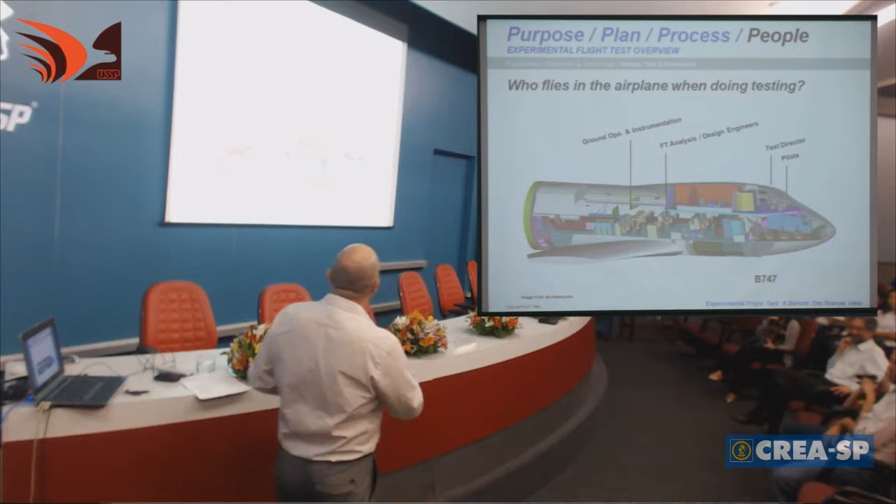Because who knows the airplane? The person who did the design. But also you need a second set of eyes, another person that is seeing the same data and is giving another opinion.

And then on the back of the airplane, we have what we know as ground operations, because basically you need to fly everywhere. So you need ground operations, I think it's operaciones en tierra. So let's say that we're going to go to Iceland because we need to do some crosswind testing. Who's going to be talking with the people on the ground in that new airport? They are going to be coordinating that.

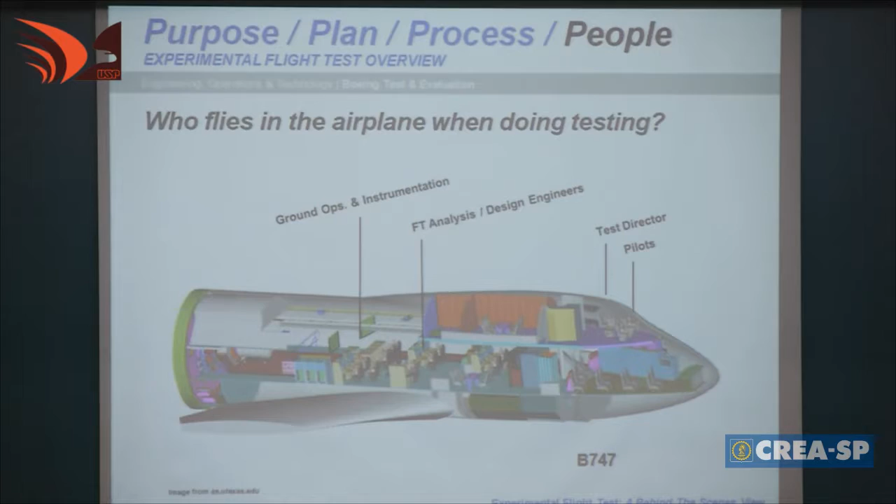Or maybe we're staying at Boeing Field, which is, let's say, our airport. It is not an airport, but let's say that it's our base. And they are going to be doing all of the configuration changes of the airplane and are going to provide the airplane with whatever is needed for that specific test. So let's say that you have a test in which they need to load pallets with some weight.

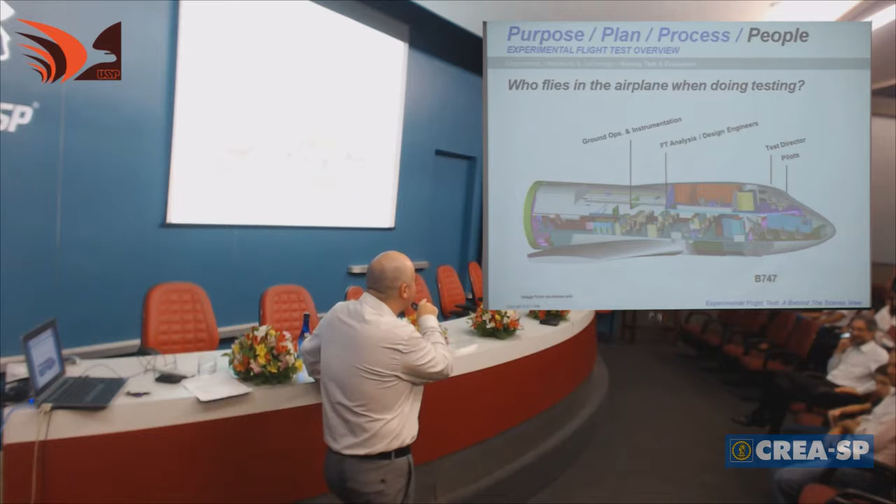Maybe you guys have taken an electronics class, and I think you should, or a class in signal analysis, and you'll see, sometimes you expect to see this line, and then you see this line that is like, hold on, what is happening? Then you have to go and track that signal and see, did I do my ground correctly? Because many of the problems are ground related: you didn't ground it, or maybe you got a ground loop, or maybe simply some connector got mispinned. It's the easiest solution, but identifying that that's the problem takes you forever.

So this is basically who flies on a plane. So let me go to the next one. Maybe you'll be thinking how a flight test airplane looks inside. Everyone is like, oh, Diego, do you guys have all of these nice seats and everything finished? And I'm like, no, actually, I wish I had a nice chair to sit down.

So you guys see here racks, armarios, that are full of instrumentation and pieces of equipment for data acquisition or multiplexing, or some devices that you need to do some specific type of analysis. So let me go here. This one, you can see, hold on.

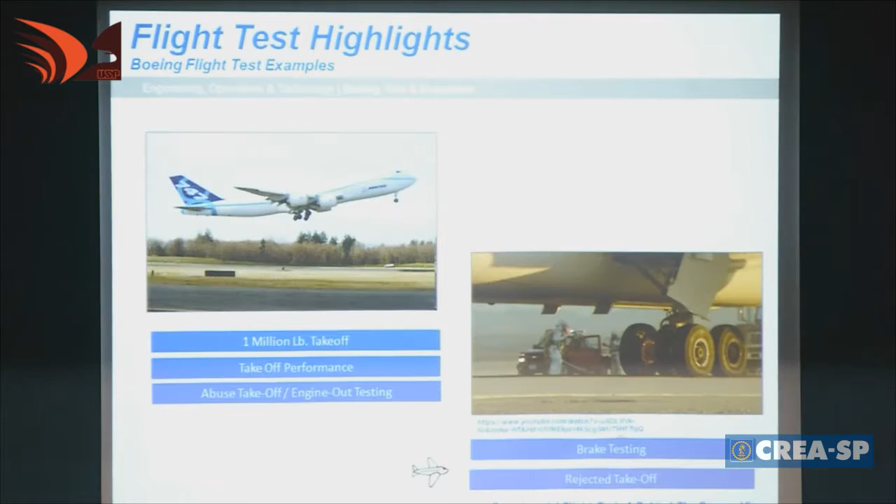As rewarding as those in Boeing test and evaluation. And getting a chance to test a brand new airplane just might be the pinnacle. Such is the case with the new Boeing 787-9 Dreamliner. And with any new airplane, Boeing must demonstrate that even when fully loaded, the airplane can safely stop the takeoff on short notice. To certify the airplane, we make sure that the airplane can stop on the runway at its highest takeoff weight and its maximum speed.

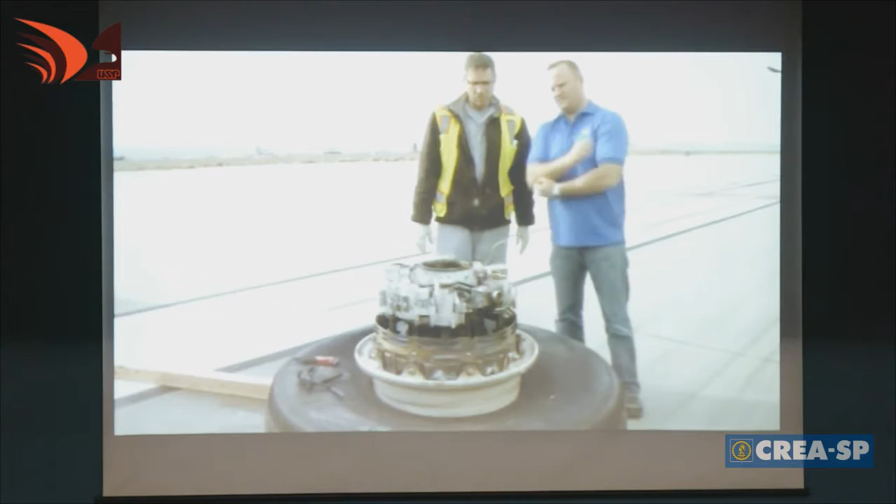It seems very unlikely this would ever happen. However, it is a requirement that we test this, and that's what we do. We test very extreme situations that we really expect to never encounter. Those extremes include not only loading the plane to its maximum weight and accelerating to maximum speed, but installing brakes that are 99% worn. We grind the brakes down to the thinnest that they can ever be. We deactivate one of the brakes to simulate that there's a failure.

So, I mean, we go to extreme lengths to make sure that the test is the absolute worst case scenario. It's a scenario that takes some intense planning. 90% preparation and 10% execution. A very coordinated effort with test engineers, pilots, emergency crews, and airport personnel, to name just a few. We've been doing landing performance and high-speed rejected takeoff performance for probably a month prior to actually conducting this test point, which is that maximum energy condition.

Then, the moment of truth. Bring the engines up. You notice that the airplane accelerates very slowly because it's very, very heavy. Accelerate the airplane again to about 188 knots of ground speed. And then once you get to the takeoff speed, you slam on the brakes. The 787-9 makes a complete and safe stop.

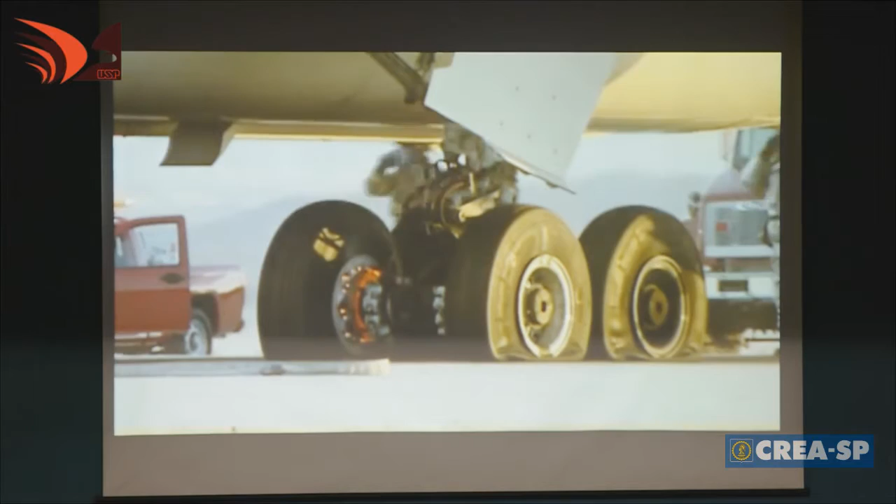Now, it's crucial to monitor the energy created from the force placed on the critically worn brakes. To simulate real-time emergency response, fire crews must wait 5 minutes before engaging with the airplane. We are monitoring the wheels, the tires themselves deflate per design. They have devices called fuse plugs within the wheels themselves that melt under high temperature and then in a very controlled fashion release the pressure of the air, of the nitrogen in the tire so they don't blow treads. We want to make sure that that occurs in a very controlled fashion.

From stopping distance to temperature to fail-safes, Boeing test and evaluation makes sure everything goes safely, exactly according to plan. From a performance perspective, it was right on. It's disturbingly unexciting. And brings the 787-9 one step closer to the flying public.

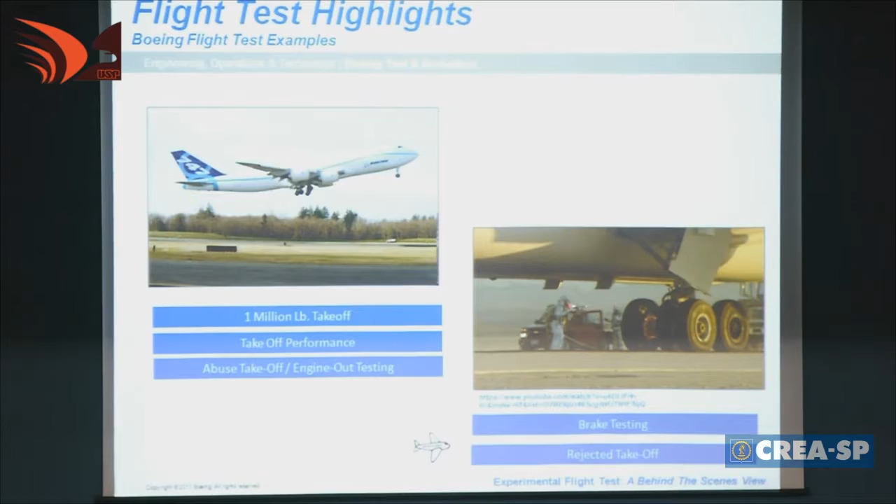Okay, so I have another test that is called the wake vortex test. So anyone have heard about this test before? So let's say, okay. How many of you, no one does kayaking, so I cannot go to that example. But if you're in a big boat, and you're in a small boat on the back, usually you see this big boat having this wave on the water, and as a small boat, you're like, yeah, same thing happens on the air, kind of, in a similar way.

So you have this big airplane. You can be in another airplane just right behind it, because you got the wings and because of aerodynamic characteristics, when the airplane takes off, you're going to generate swirls on the wingtips. And what happened with those swirls?

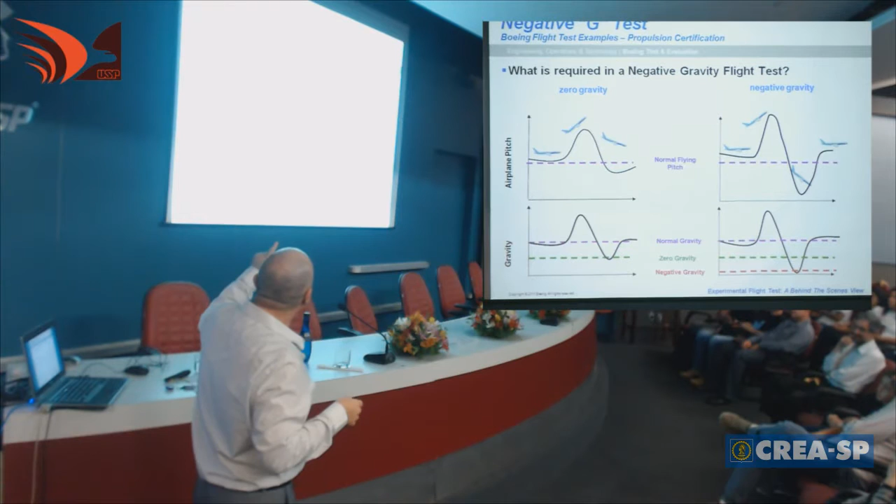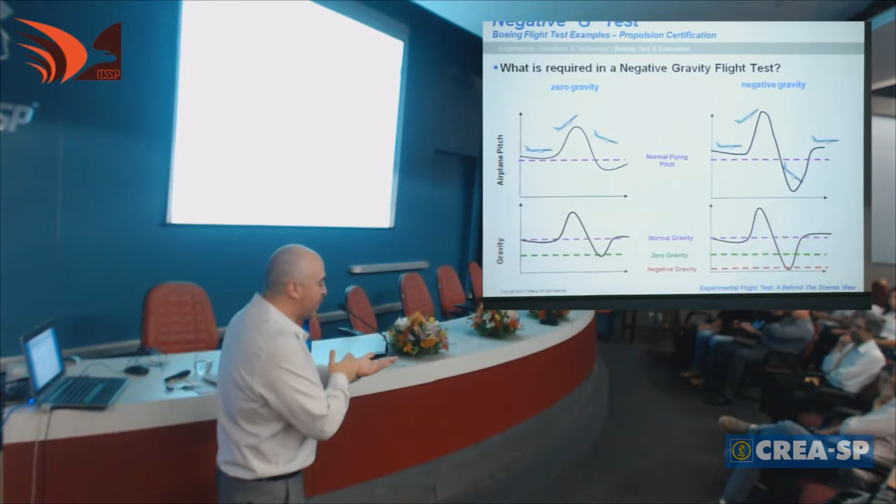So what happens with negative gravity? Usually that doesn't happen. But if you go into an elevator, and the elevator goes too fast, you're like, yeah. It's a state in which you're going to be able to float, basically, because the speed at which you go down is higher than the speed of gravity. And how do we accomplish that? Changing the pitch of the airplane. So you're going to go up, and then you're going to go down. I'll show you the video, it is more interesting. But you're going to experience values of negative Gs. There are some tests that go between 0G and 2Gs, and others in which we see negative Gs.

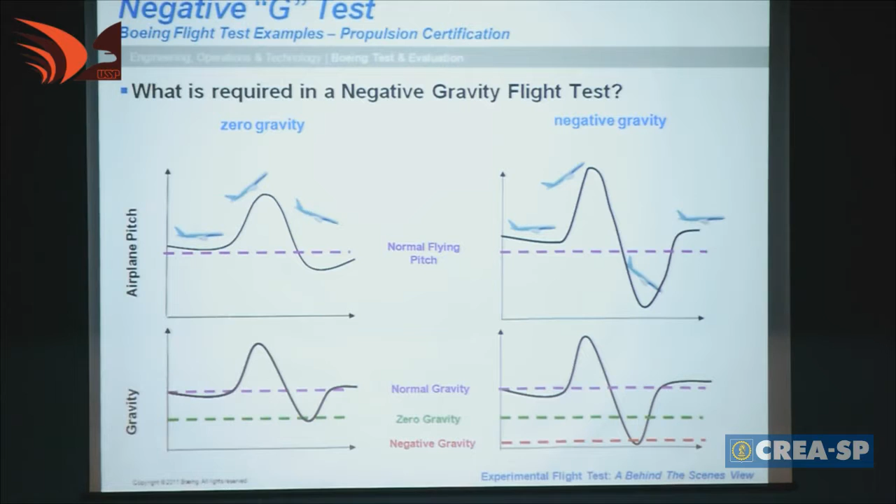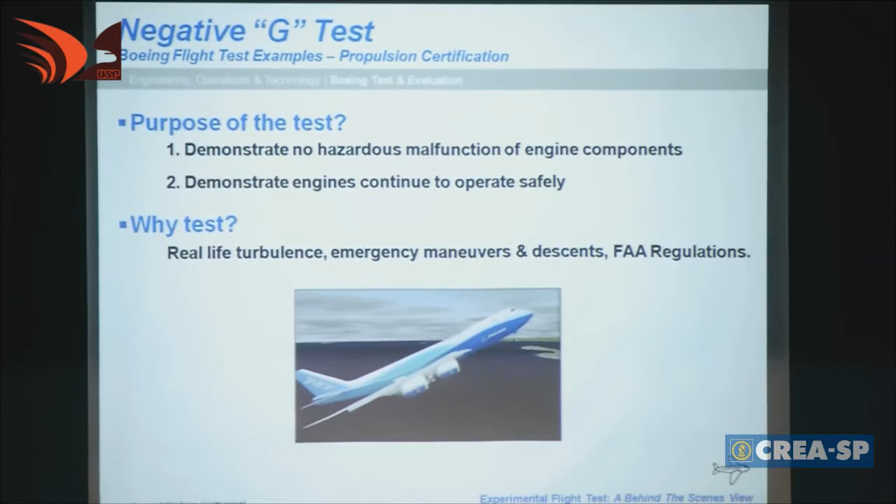Okay, so why do we do this? We need to make sure and prove to the world that if we go into these conditions, the engines are going to be able to withstand them and continue to operate safely. Also, this is part of something called flight load survey, where you go to crazy loading conditions on the airplane to test that the airframe is able to withstand those.

Actually, I was inside this airplane when this happened.

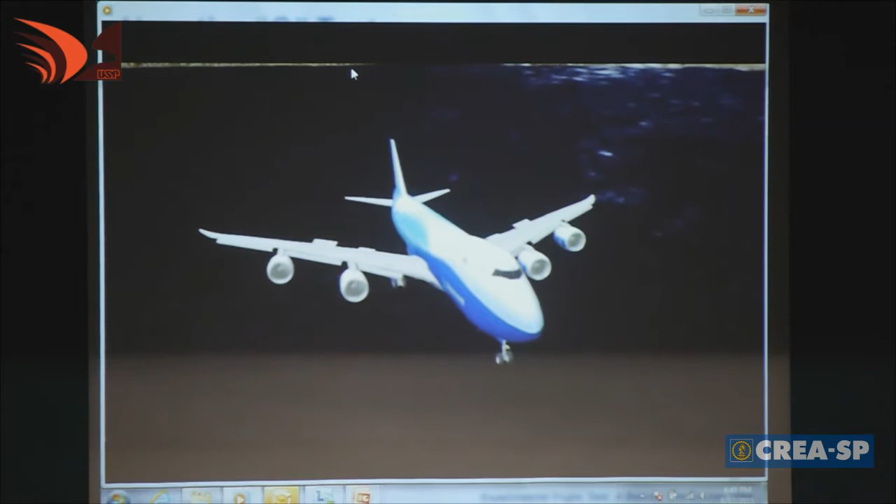Going to 2 times the force of gravity greatly increases the load on the 747-8, which is already flying at its maximum takeoff weight of nearly 1 million pounds. As you start putting stress on the airplane, you'll see the wings will start bending up, and they're under tremendous stress. Really what we're trying to do is take it to the outer corners of the design envelope and demonstrate that the airplane can withstand the flight maneuvers and at the gross weights that we designed it to.

In the cabin, the flight test engineers and structural analysts are trying to stay in their seat while monitoring the airplane's performance. These roller coaster flights can last 4 to 5 hours and are not for the faint of heart. Because they can finish it so quickly, right? You kind of don't have time to, oh yeah, that was great. You got to concentrate what you're doing, right? Get ready for the next one.

A grueling test to make sure the new Boeing 747-8 freighter can handle loads far beyond what it will face once in service. Airplane handled great, easy to fly, well behaved, and just did a great job.

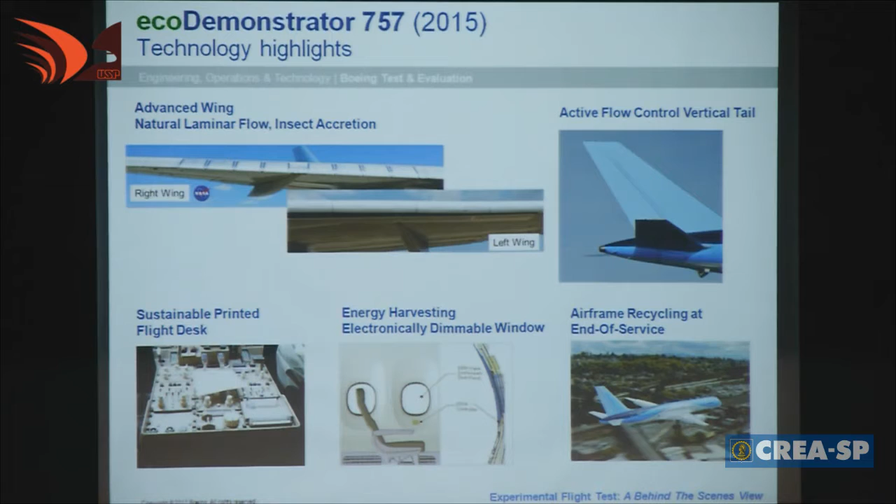Okay, the other one is active flow control. This one is a flight desk that is 3D printed, but what is innovative about it is that we were using recycled composite materials. The middle one on the bottom, the energy harvesting electronically dimmable window, just imagine the concept of having a solar panel, una celda solar, in the window. You're trying to capture energy from the sun, store it, and then use this energy to dim the window. Something the 787 already has is that in the windows we don't have the normal curtain. We push a button and it gets dark. We push another one and it clears up. But in this case, we're trying to prove a concept in which we get the energy from the sun. And the other one is the airframe recycling.

So basically, on the first one, there were different coatings provided by NASA. Have you seen when you're on a long drive and suddenly you see all of those insects on the bumper of your car? Same thing happens with the wing of an airplane. That's why we were going to a place with bugs. Because when you have bugs, the laminar flow is going to change. So we were trying to look for ways to reduce the accretion of bugs, and we were testing some nanotechnologies incorporated in these coatings to reduce that accretion of insects. And also some new design on the leading edge of the airplane.

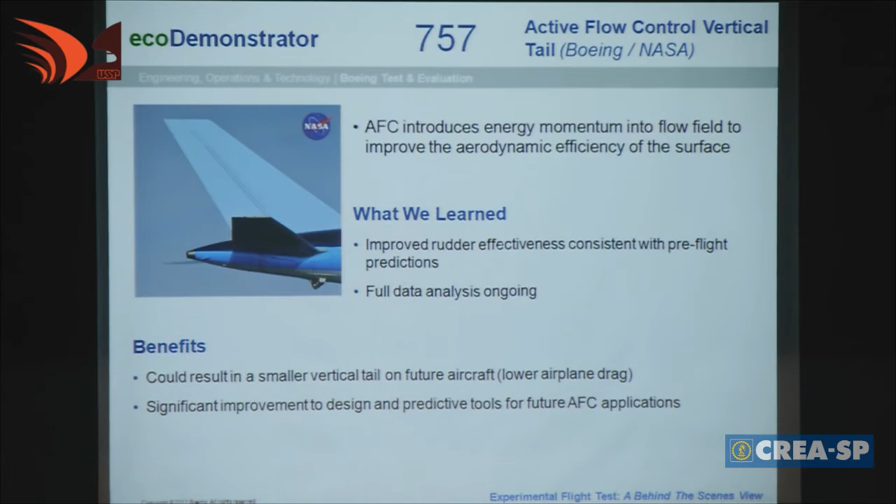So an implication is if we were able to prove that this technology could be incorporated, it's going to reduce the height of the tail, which is heavy, and usually you have space constraints in some hangars. Better crosswind conditions also. Lower area on the tail. And usually the higher stress concentration is going to be on the lower part of the vertical fin.

This one was 3D printed, which we incorporated into the 757, and we were showing that it works, and that we are able to recycle some of the materials.

And let's see. Okay, we have 5 minutes. Do you guys want to see another video? Hopefully it works.

When you're testing an all-new airplane, you go on so many flights, work so many weekends, they start to blend together. But for these Boeing pilots and engineers, this Saturday morning is one to remember. Finish the last test required to certify the 787 Dreamliner. Getting to the point where we've worked so hard for so many years, at the end it's just unbelievable. Just as the fog rolls in, the team sets off from Everett, Washington to complete function and reliability.

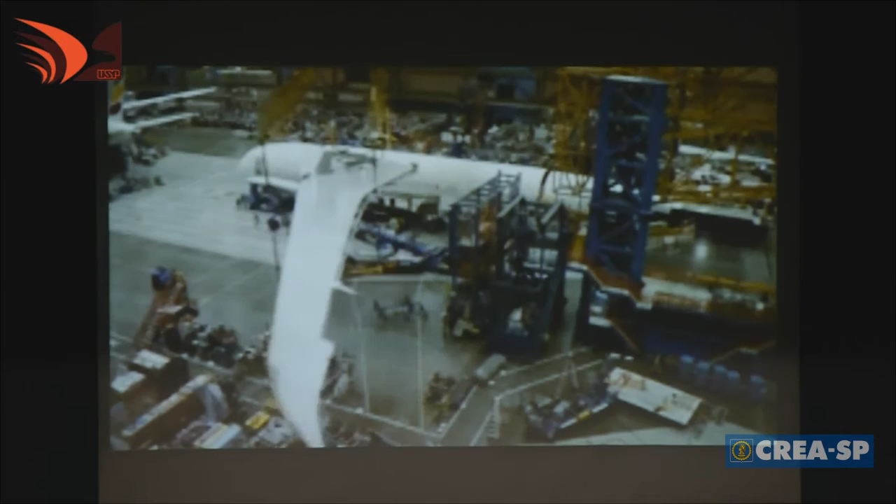To look at all those features working together seamlessly, and you understand all the work that it took to get there, you're just so proud of the tenaciousness of the team that put it together, and you wish you all could have been there to watch it.